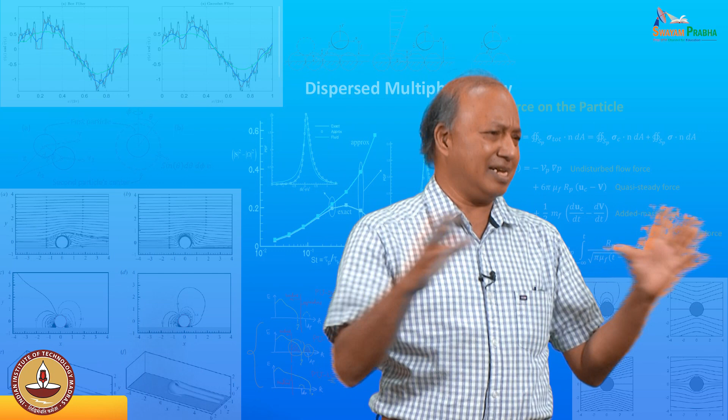the particles. Conductivity of the mixture can be written in terms of, and I will talk a little bit about the details. Right now I'm just talking about phenomena, not the mathematical details. We will talk about it, but keep in mind that when particles are there, typically at 1%, 2%, 5% or 10% volume fraction, some of these thermodynamic and transport properties do change, and you have to take that into account sometimes.

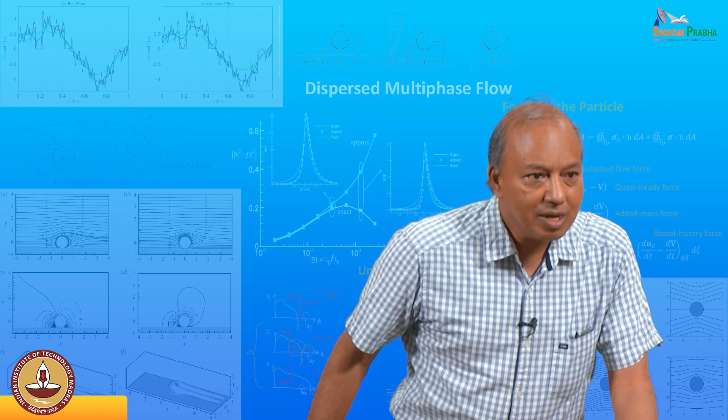Yes, sir. So for highly dispersed flows, will thermodynamic effects be there, sir? Highly dispersed flows, for example, volume fraction 70%, 80%, or 50%. A very high volume fraction? Yeah, will thermodynamic effects be there?

Well, that's a great question. It is important, but is it important compared to the other four effects? Because yes, viscosity may change, but maybe the other effects may trump that. Maybe inertia effect, buoyancy effect, or slip effect, the drag, may be much more important than the change in viscosity.

So modeling is not easy. It's just a question of which effect is important. I just want to bring to your attention that with particles in there, you just can't use the viscosity of pure fluid anymore. That's the main message. Whether it's important or not will depend on the problem.

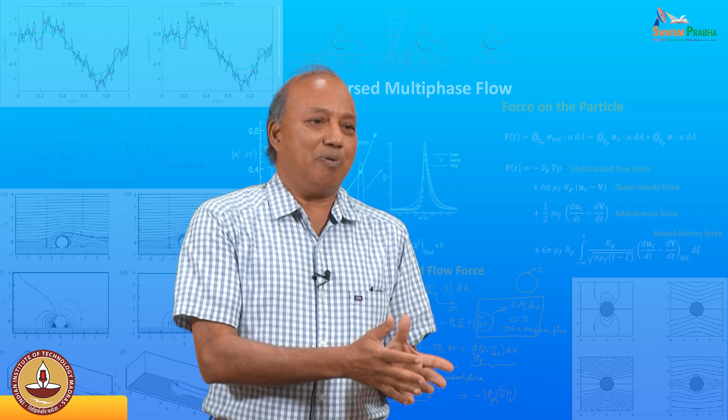So now we talked about length scales. Now let's talk about time scales. There's a lot of message here, but I'm going to send these slides to everybody, so I'm not going to go over this. The main thing that I want to talk about here is,

imagine that you shoot a particle. On the left here, let's say you shoot a particle at velocity v0 in a stagnant fluid. I'm trying to talk about how to think about the time scale of a particle. Here is stagnant fluid, and the particle is shot at velocity v0. It's the time scale on which that velocity will go to 0, because the surrounding fluid is not moving, so drag will make it stop. The rest is a lot of details.

So how do you analyze that? You take the equation mass times acceleration of the particle. Newton's law is the sum of all the forces, and we will talk about that. You put all of them and solve it, and the answer is the velocity of the particle is going to decrease following this kind of equation. In other words, it's going to exponentially decay towards the surrounding fluid velocity.

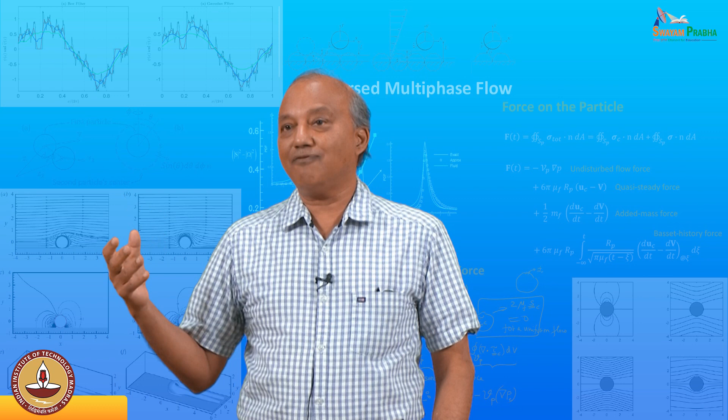Now this is a very interesting thing, because you can ask what happens if, in a turbulent flow, the surrounding fluid velocity keeps changing? If the surrounding fluid changes on a time scale faster than this, the particle will never catch up with the flow. It tries to catch up with the flow and the fluid has changed. On the other hand, sometimes the particle is so small. So that depends on this diameter. Essentially the lesson is, very small particles, micron sized particles, can move with the fluid without any problem

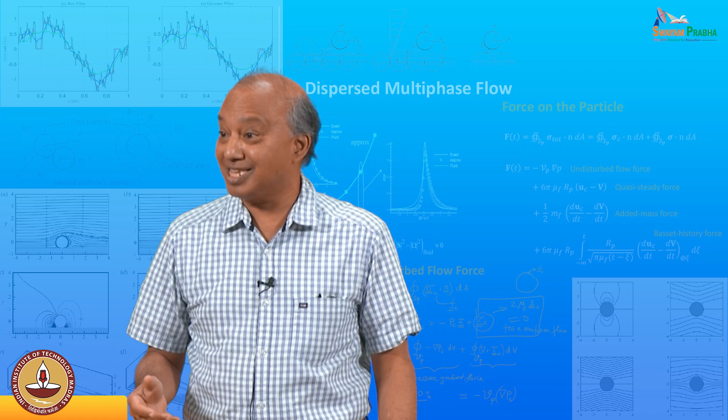because they adjust. Whereas if you throw a cricket ball in a turbulent flow, I used baseball there, by the way, but here cricket ball is much more appropriate. A cricket ball will never follow the fluid because its inertial time scale is too long. It responds only to your initial velocity, not to the fluid. Whereas a micron sized particle, you could have injected it at some velocity, but within a microsecond it has forgotten that you have thrown it in the fluid. It will just follow the fluid. That's why this quantity is a very important quantity.

So here I was embellishing a little bit more. This formula that I have is sometimes different. You might find it different from many applications you may see, because there are people who give the time scale a little differently for heavier than fluid particles, or when the Reynolds number is small, they may make some changes. But this is a very important quantity.

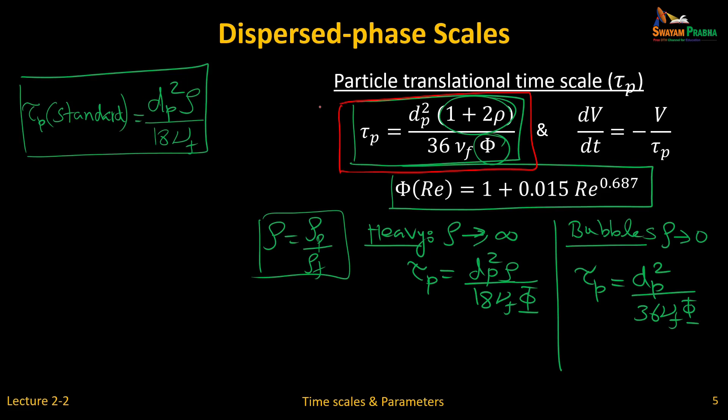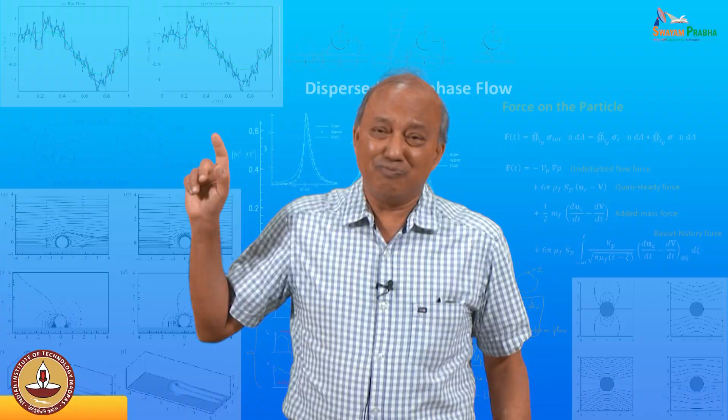Sir, can you please go to the previous slide? In this slide, I think this tau p can be called a time constant for the particle. Yeah. So the beauty is that phi is the one that stops it being called a time constant, because phi depends on Reynolds number. It depends on the nonlinear. Does the particle follow the fluid or not? Depends on drag, and the drag depends on Reynolds number. So that makes it a little complicated. If the particle is very small, then tau p is a constant, phi is equal to 1, and we will talk a lot more about this.

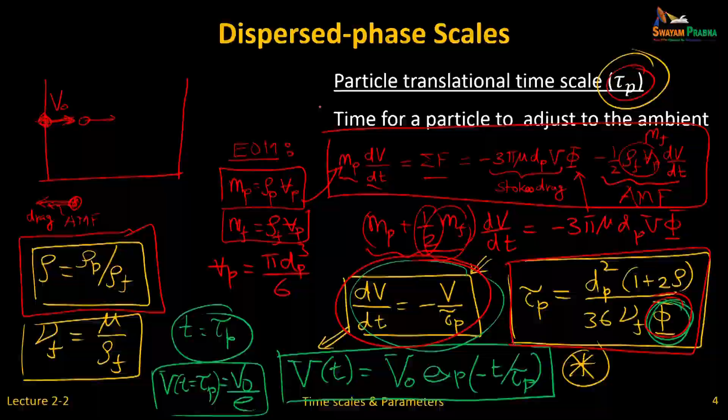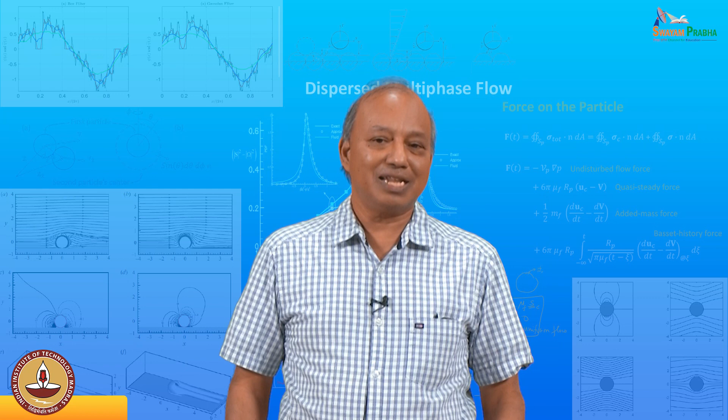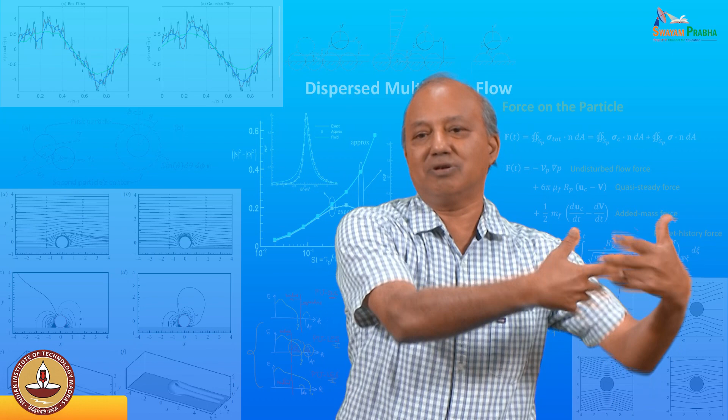So for a single particle also that phi will? This is for a single particle. Everything I'm talking about is an isolated particle. Okay. So effectively the time constant will be the time for the particle to attain around 63.2% of the fluid velocity? Absolutely, it approaches to 1 over e. The difference decays to 1 over e. That's the technical detail. So if you wait for 3-4 time constants, it will virtually be there. It's a time scale on which it exponentially approaches the surrounding fluid velocity.

Now what about temperature? If a particle's temperature is different from that of the surrounding fluid, will it reach the same temperature? Well, tau t, this is the formula. Again d squared comes, so very small particles essentially have the surrounding fluid temperature, whereas very big particles can have a substantially different temperature.

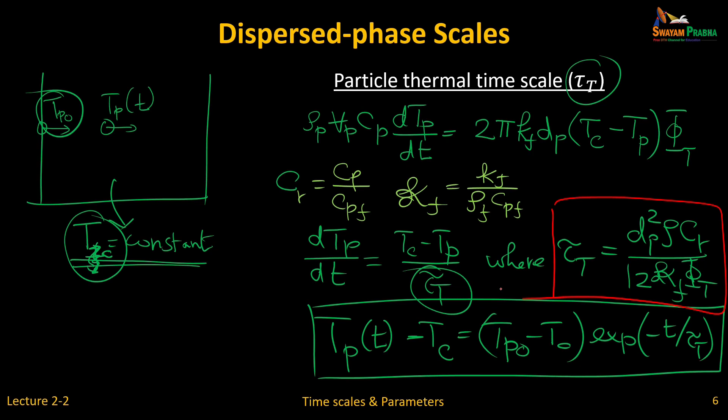Now you can extend this to rotation rate. Does the particle rotate with the surrounding fluid? If the fluid has some vorticity, will the particle be rotating? Well, there is a rotational time scale. I didn't give that, but in the lecture notes in chapter 2 you will find the time scale on which a particle will spin as fast as the surrounding fluid. Again, it's proportional to diameter squared.

Okay. So the key is a prefactor; rho is again density ratio. Rho is equal to rho particle divided by rho fluid, how heavy the particle is. Of course, when rho is 1, it is a neutrally buoyant particle, so it goes to 0. And when rho is 1000 times heavier, the numerator gets really large. And in fact, this ratio for a heavy particle becomes 1. Okay. For a bubble, it is the opposite, it becomes negative. In other words, a bubble rises rather than sinks.

So for a bubble, rho is 0. Okay. So you have minus 1 divided by half. Okay. And tau p is what we saw earlier, times the constant that we talked about, and times g. So it's a very simple problem. An inertial particle, inertial means large tau p, will settle fast because it's heavy. A light particle that responds to the fluid doesn't settle a whole lot. Okay, it's very slow to settle.

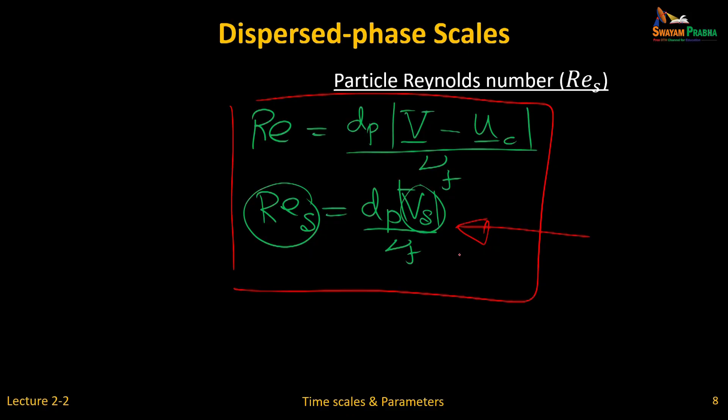Now I am not going to go into the gory details, just to give you some idea. In the lecture notes I calculated and I plotted them. So what's done here is size of the particle. So you have millimeter sized here, this is a micron sized particle, and much larger particles are to your right. And on the y axis is tau p in seconds. Okay.

And 3 different cases. What happens if you have a water droplet in air, or a sand particle in water, or an air bubble in water? Water drop in air, density ratio is 1000. Sand particles in water, density ratio is 2.65. A typical sand particle is 2.6 times heavier than water. For an air bubble, its density ratio is close to 0. Okay. So we see all these things, so you can get a rough idea.

So I consult these pictures often because it gives you an idea about how fast it will adjust to the surrounding flow. And the one interesting thing that you find is that they all follow diameter square. So this is like slope 2, because phi is 1 here, so the Reynolds number effect is not there. So for all these very small particles, Reynolds number is very small, Stokes drag works, and therefore you strictly follow diameter square.

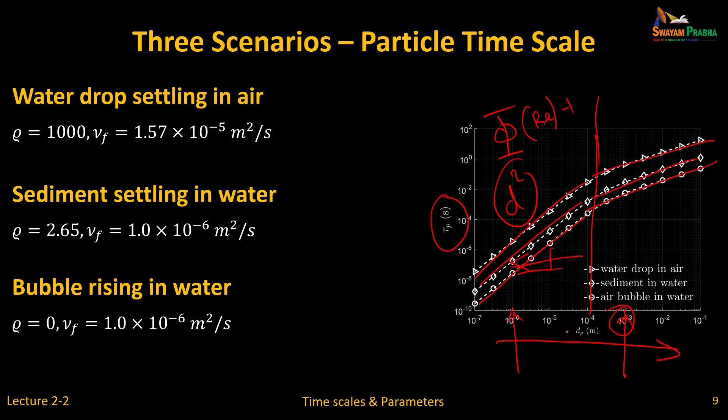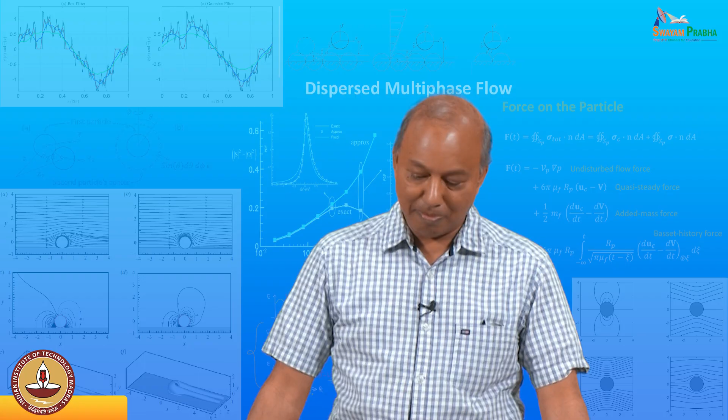So for 100 micron particles, Reynolds number is about 1. If you go higher than 100 micron sized particles, they are sort of simply falling down. Even if you have sand particles of 1 millimeter, when it settles, its Reynolds number is bigger than 1. So that's something to keep in mind. So that's exactly what I said is plotted here. You can see this is Stokes flow, and finite Reynolds number flow.

So let me erase that. Okay. So you see that I have drawn a horizontal line at Reynolds number 1. So you can see all these particles settle at Reynolds number less than 1. These particles have finite Reynolds number effect. That changes the slope of these curves. Okay.

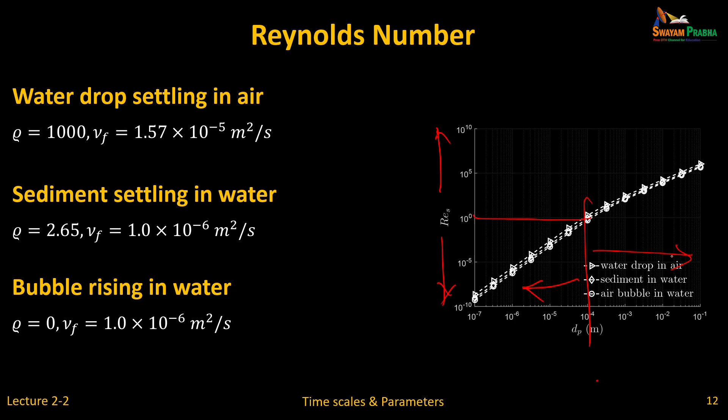So Stokes number is the concept that I was earlier talking about for spinning vortices, etc. Stokes number we will talk about very often. It's basically what I said earlier: the tau time scale of the particle versus the fluid time scale. If Stokes number is less than 1, the particle adjusts to the surrounding flow very fast.

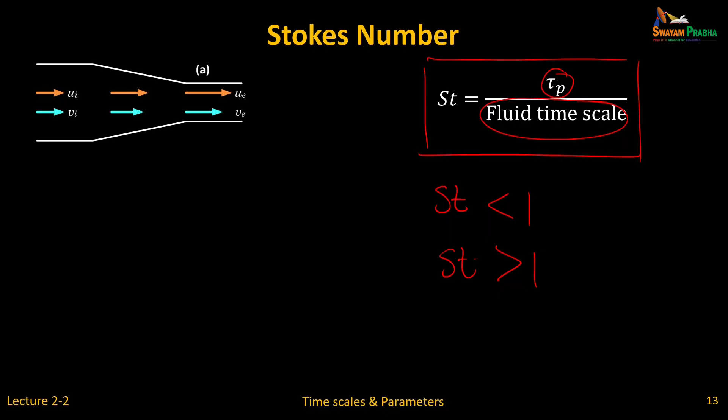If Stokes number is greater than 1, it's more like a sports ball being thrown in a surrounding medium. It's not responding to the surrounding flow. It's more responding to the initial kick you give.

So you can see that very clearly in this sort of converging nozzle. The fluid velocity increases. Upstream, if there was enough length, the particle is going at the same speed as the surrounding fluid; let's say it has equilibrated. Now as the fluid is accelerating, will the particle accelerate?

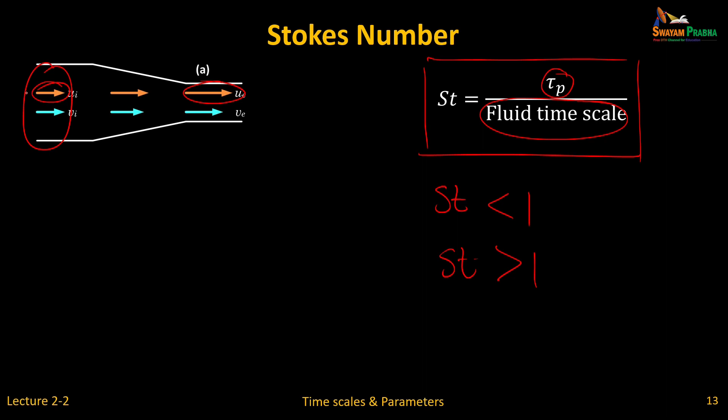How fast? Now a lighter particle will just follow in lockstep with the fluid because it is responding to the ever accelerating fluid immediately. So the picture looks like this. The solid line is for the fluid, and the red curve I have drawn on top of it is what a micron sized particle will do, very fast.

A 100 micron particle, maybe a millimeter, maybe a couple of millimeters. Whereas if you had a large one, it may not respond at all. It may just continue and ignore the fluid, maybe change a little bit. So Stokes number less than 1 will follow the fluid, and out here you will have Stokes number greater than 1. So Stokes number is a very, very important quantity.

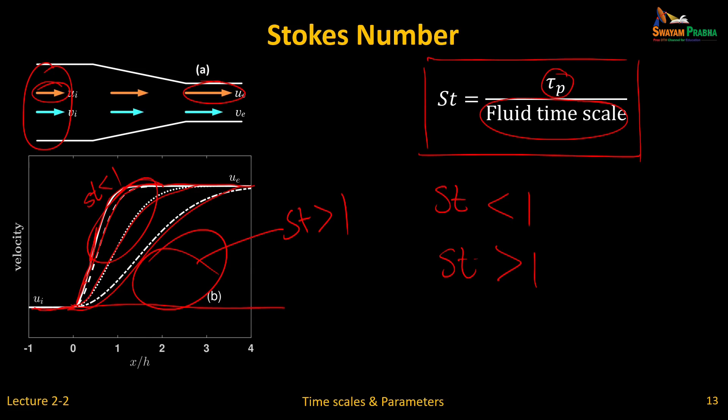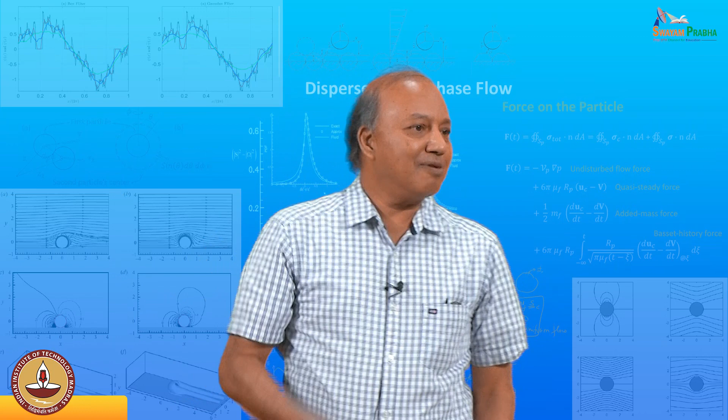Now the issue is, I said a micron sized particle will adjust, but what if it's not a slow converging nozzle but a shock hitting the particle? A particle is there, a shock comes, there was no fluid motion, and suddenly as soon as the shock goes, the fluid velocity could be 300 meters per second. Boom! The fluid time scale is in nanoseconds or maybe shorter.

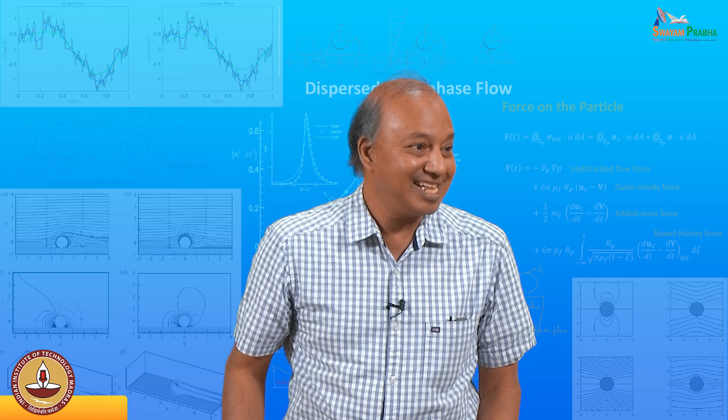So is a 1 micron particle's Stokes number less than 1? It's not always less than 1. It depends on what you do. If you deal with, say, environmental flows which are slow moving, even for 100 micron the Stokes number may be less than 1. In the hyperpycnal problem that I talked about, even up to a millimeter you may say it's not that big, because the fluid motion is slow.

Whereas in an engineering application, a fluidized bed or something like that, 10 micron may be small, but maybe 100 micron or 1 millimeter is too big. Whereas in a shock, even 1 micron is really too big. You really need molecular scale for it to respond rapidly. So Stokes number is an important quantity, and it changes from problem to problem.

Now this is the interesting thing. What about a vortex? The vortex time scale: omega is a strain rate, so it has units of 1 over seconds. Therefore, the inverse of that is seconds. So the Stokes number is omega, the vorticity strength, times tau p. So if you have an intense vortex, omega is large, then even small particles will be spun out. But if you have a weak gyration, you really need big particles to be spun out.

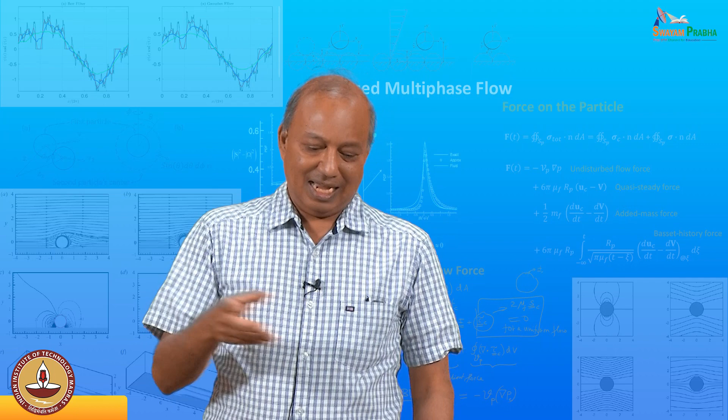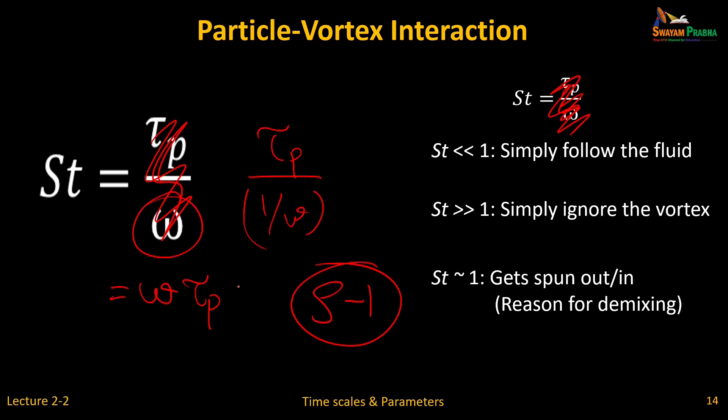Same thing applies, just like earlier we saw, when density rho minus 1 is very important. Later we will see that the density ratio, whether it's bigger than 1 or less than 1, is important. If the fluid and the particle are the same density, it won't be spun out or pulled in. Heavier particles, if rho is bigger than 1, will be spun out, and if rho is less than 1, it will be sucked in. And that depends on Stokes number.

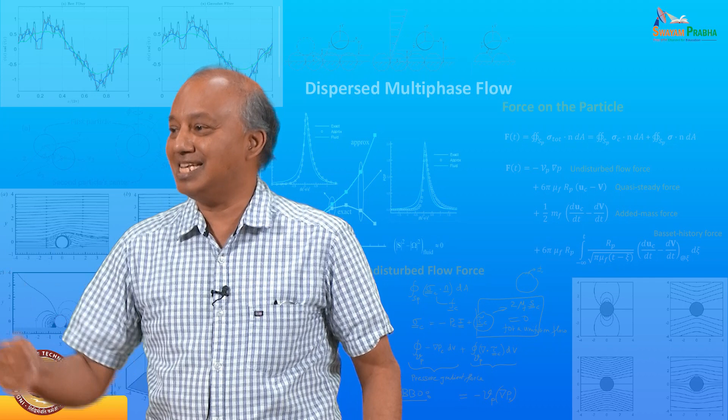So will a 1 micron or a 10 micron or a 100 micron particle heavier than the fluid be spun out? It depends on how strong the vortex is. Just the size itself is not good enough. It is size versus the time scale of the surrounding fluid.